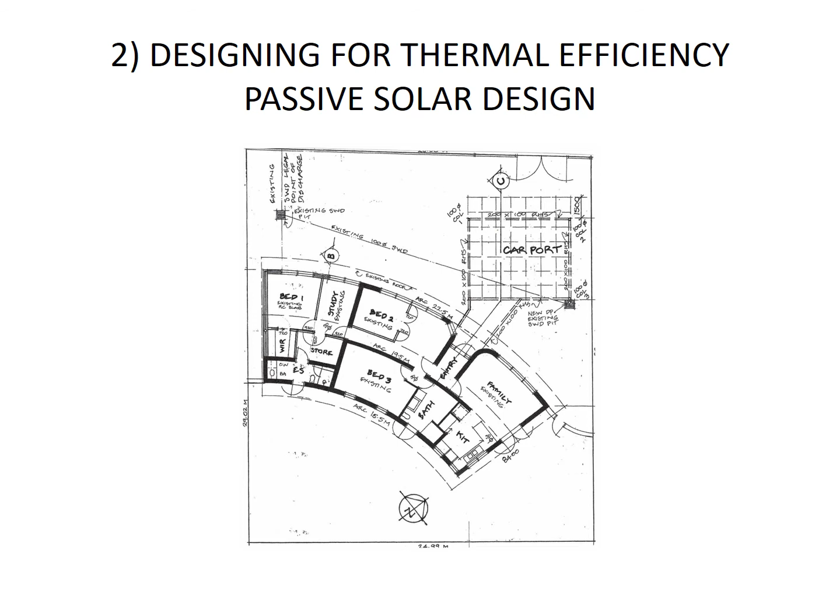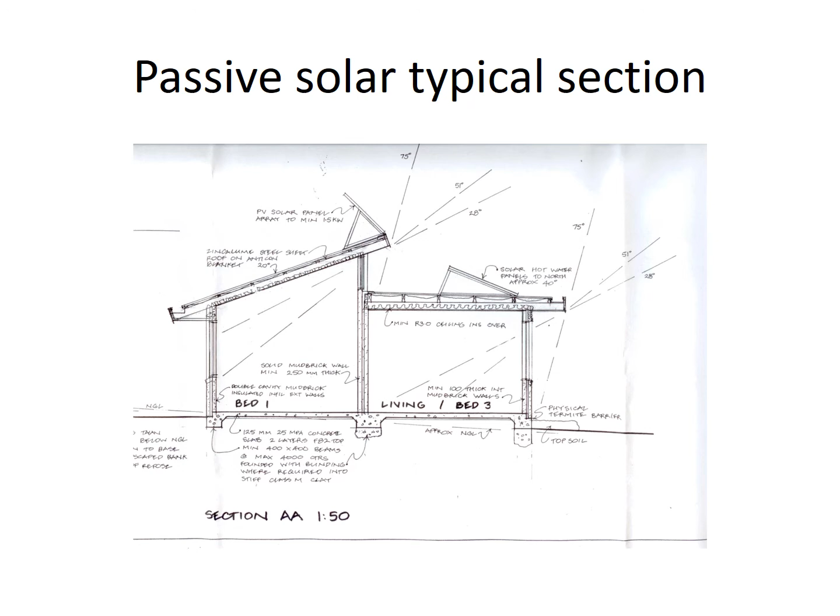Thermal design is the most important to get right when you're building or renovating, and it makes a huge difference to the comfort of your home and the energy use and costs, of course. Typical solar section has the sun coming in fully in winter and keeps it out in summer with correct eave overhang. Best friend for that is the north direction. So if you can, get as much of your glazing to the north with good eave protection.

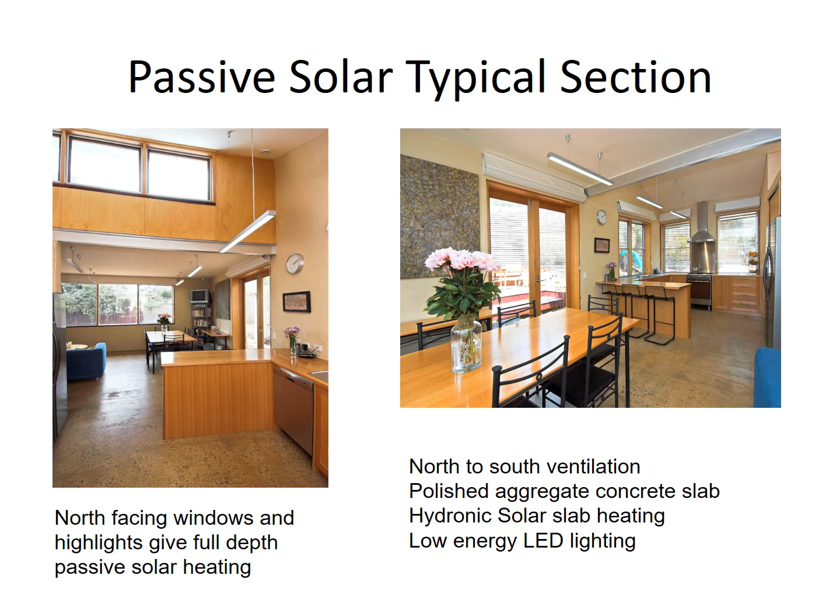Highlights also help, so they can bring the warmth into the back of the place in winter and keep it out in summer and act as a thermal chimney in summer, where you can cool the house by opening and having crossflow ventilation. Insulation is important, of course, double glazing.

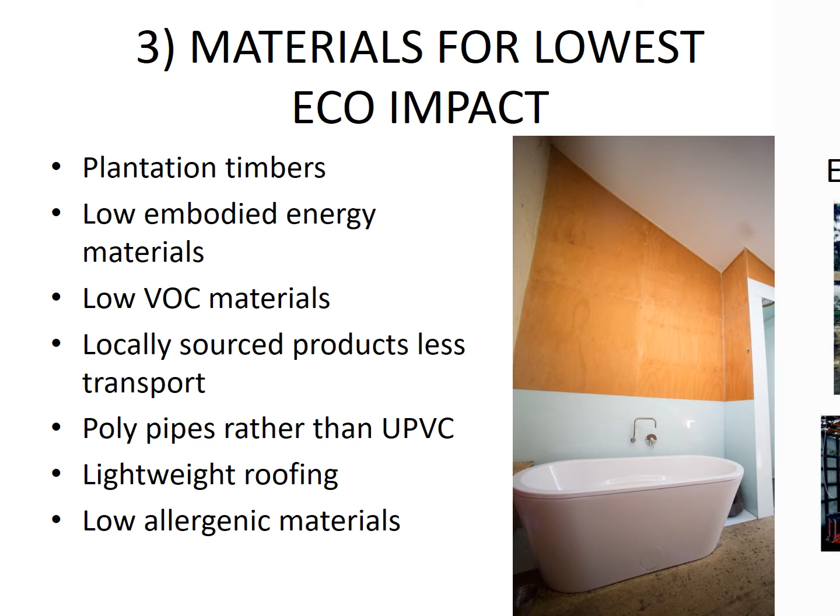When we design, we always look for materials for lowest impact, sustainably sourced materials, low VOC, low allergenic, less toxic materials wherever possible. Recycling of existing buildings. Most things are recyclable. We did a lot of that here. We moved some on, but we used some of the materials in the new home.

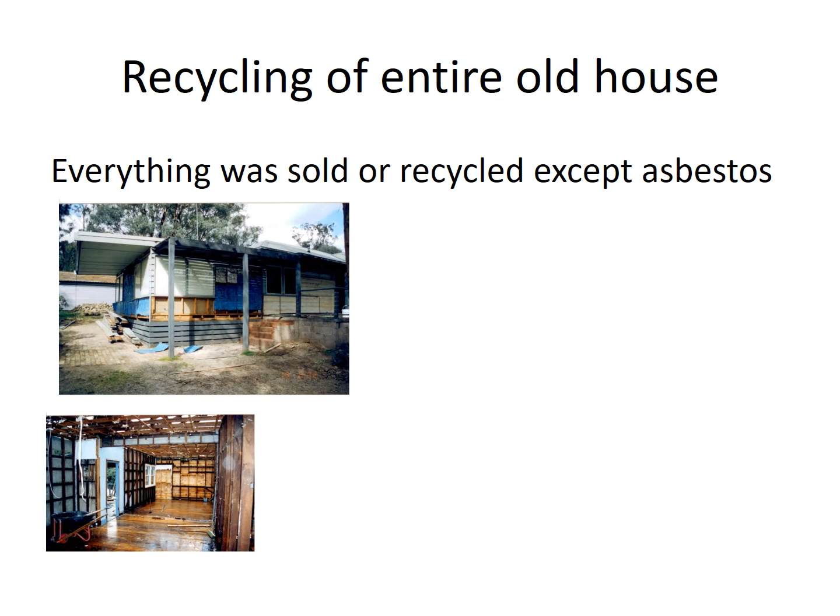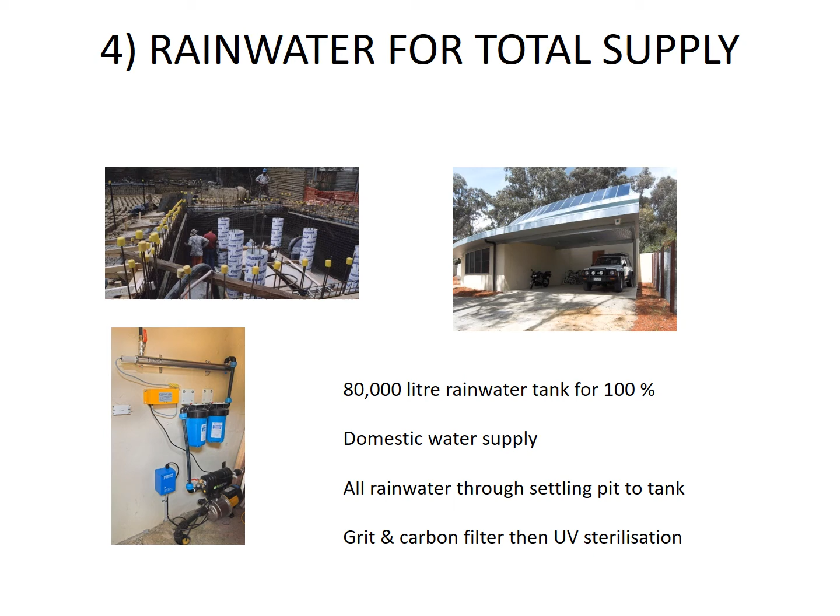Rainwater for total supply. For ergonomics on a residential block, we put the tank in the ground and treated the water to have a 100% supply for drinking. Solar hot water and heating is pretty easy with some evacuated tubes on the roof. We had a backup boiler originally, a gas-fired boiler. Now we're changing over to a 3-phase electric heat pump, which is even more efficient on energy.

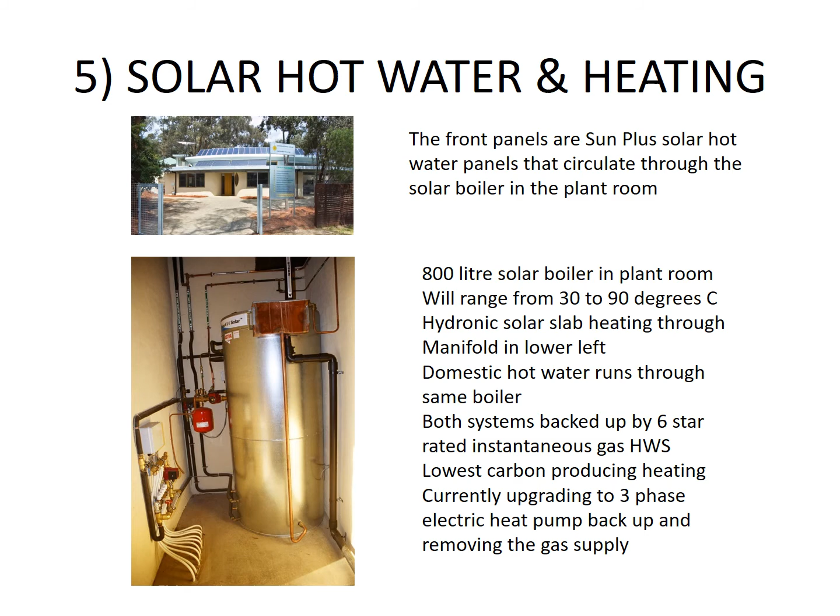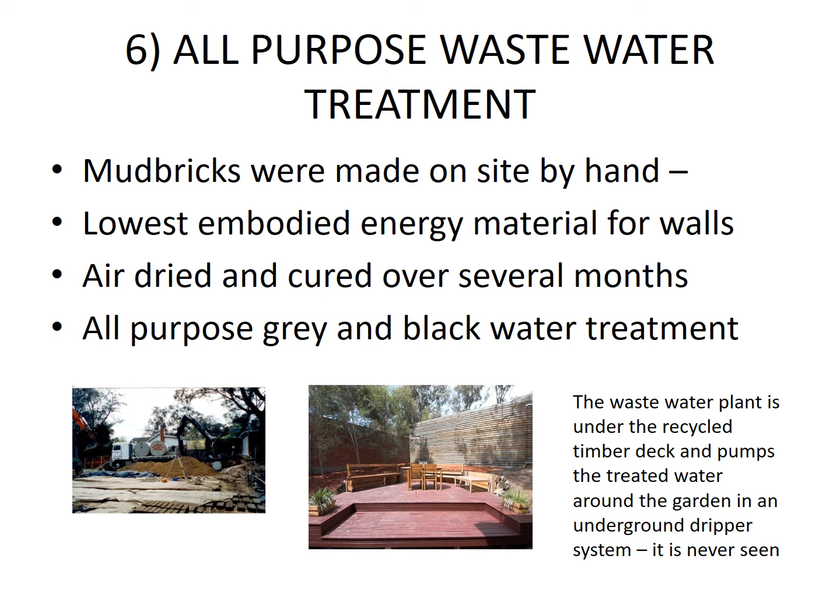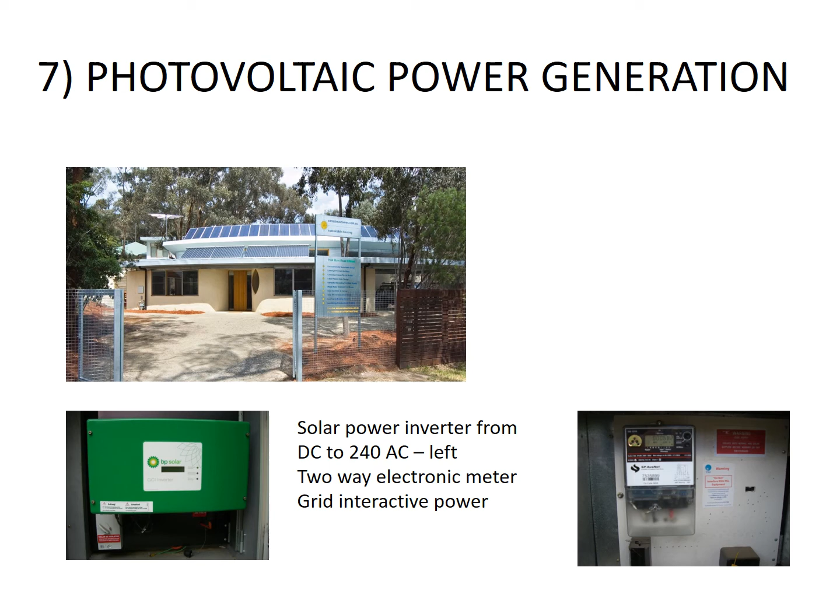All-purpose wastewater treatment is pretty easy to do, to reuse for the garden. If you're going to the moon, you can recycle it to drink, but we can use it at least for watering and general purpose. Photovoltaic power used to be an extravagance. Now it's a no-brainer with very good return, with 10 kilowatt supplies on domestic places we build and 30 kilowatt supplies on commercial that can power the whole place and feed back to the grid as a micro generator.

So the idea is to manifest these things into real buildings, get into action, make a list of the things you can do. If you're building, that's a real golden opportunity to employ these principles and make a big difference. But then you end up with a much more comfortable home that's in tune with the elements, save energy, save money, and also live in a place that's much more comfortable to be in.